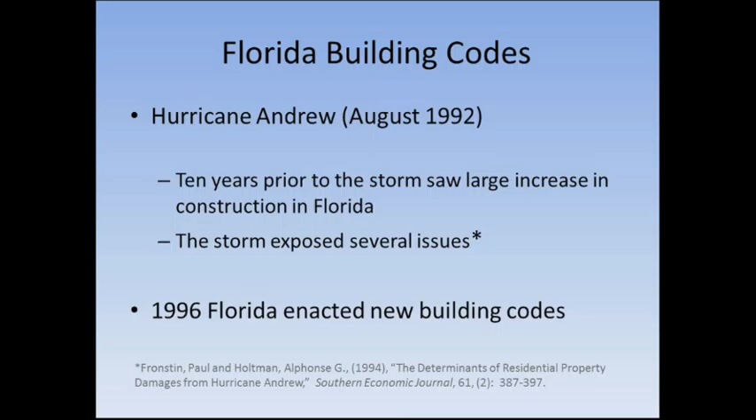Because we're going to look at three different things, and I'm going to do extremely quickly and may skip about half of it so we can get to the end. The effect of the recently enacted Florida building codes after Hurricane Andrew, a damage study on hail that I did with a colleague at Wharton, and then a most recent study that I've done with a colleague, Paul Kovacs, who's actually here, on benefit cost, because the economist is not interested in can you build something that will withstand an EF5 tornado? Do the benefits of this outweigh the cost? That's the only way we're going to be able to sell this idea. So really quickly, let's just go through.

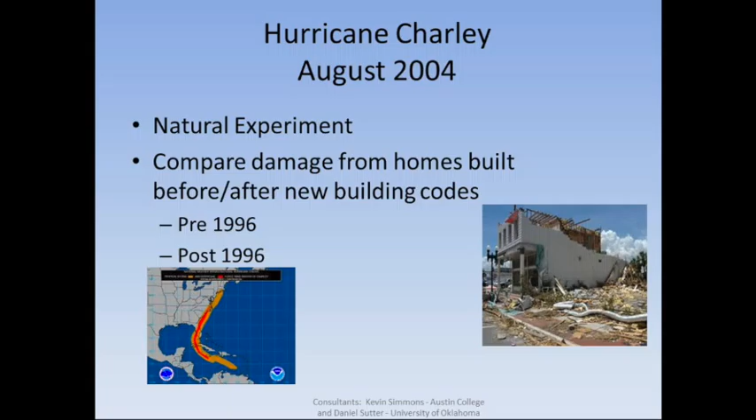In Florida, Hurricane Andrew illustrated that we had really inferior construction that had happened in Florida in the 10 years leading up to Andrew. Tanya's employer, IBHS, did a study after Hurricane Charley that provided a natural experiment. We could look at the damage for those built after the new building codes and compare that to the ones before. And what IBHS found was that in terms of the claim frequency, the newer homes are 60% less likely to have a claim, and further, if they did have a claim, the claim was 40% lower than homes that were built prior to that.

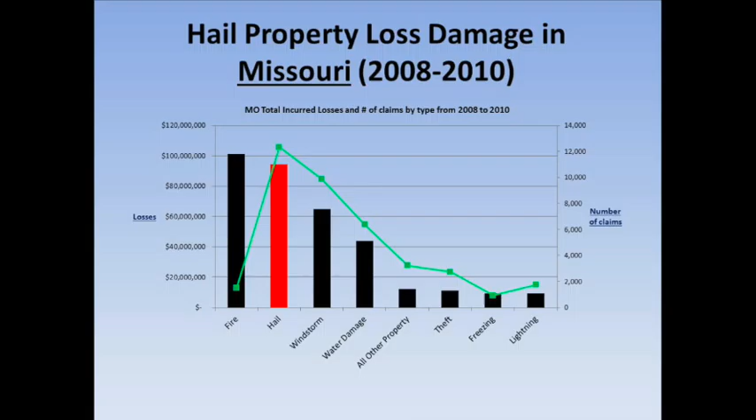Jeff Czajkowski and I, a colleague at Wharton, are doing a study right now in the state of Florida where we're looking at the entire decade. Our study is basically backing up what IBHS found. We're finding almost exactly the same results. Now, Jeff and I published a paper a year ago on hail. So Tanya's going to be really interested in this. I think she's actually seen the results of this paper before.

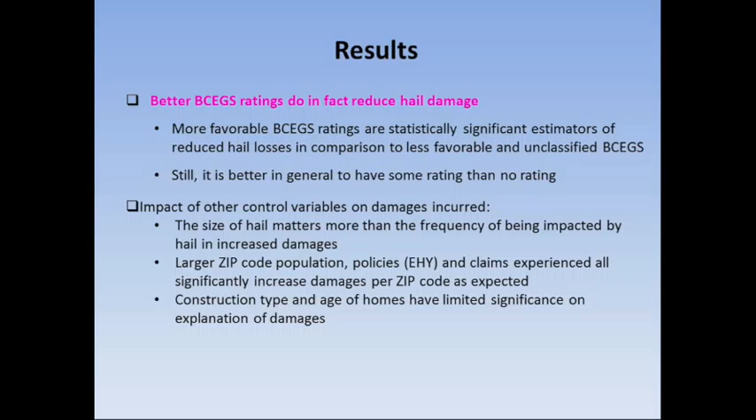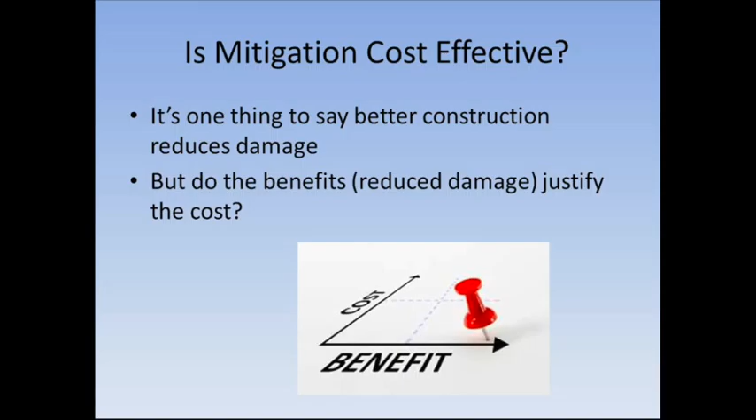And this is one of the things that Jeff and I used in our empirical model. Not to bore you, it's an econometric model, so those of y'all that avoided economics in college, we'll just skip right over that. But it's an econometric model that tries to understand what effect the BCEGS rating had on losses. What we found was that, in fact, the better BCEGS ratings do reduce damages. In fact, they reduced it by about 20%. So having the better ratings reduced overall damages from hail by about 20%. Now the economist comes up. It's one thing to say better construction matters, but do the benefits justify the cost? So what we're asking is there a cost effectiveness for the mitigation?

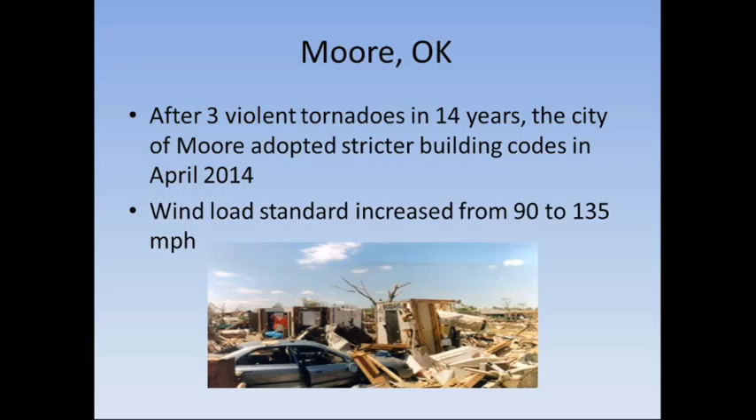So to look at that, we're going to look at a study that Paul and I, along with a colleague at University of Western Ontario, Greg Kopp, did. This was published this year in Weather, Climate, and Society. It was also the focus of a New York Times op-ed that came out last month. We focus on Moore, Oklahoma. We've talked about Moore, Oklahoma quite a bit already. Moore, Oklahoma regrettably had suffered 3 violent tornadoes in 14 years. The most recent was in 2013, which, as Aaron alluded to, we had some fatalities in a local elementary school.

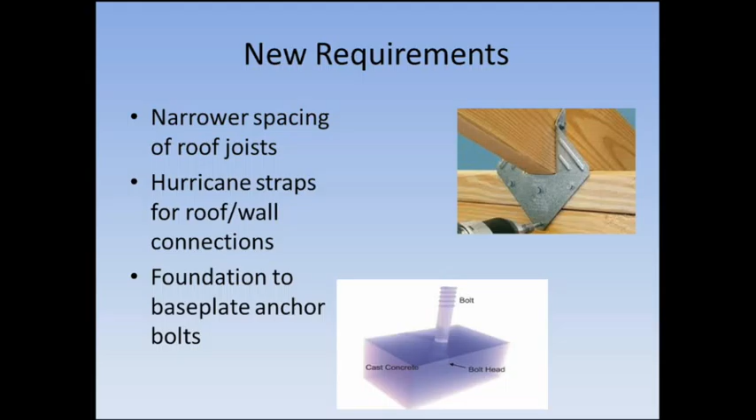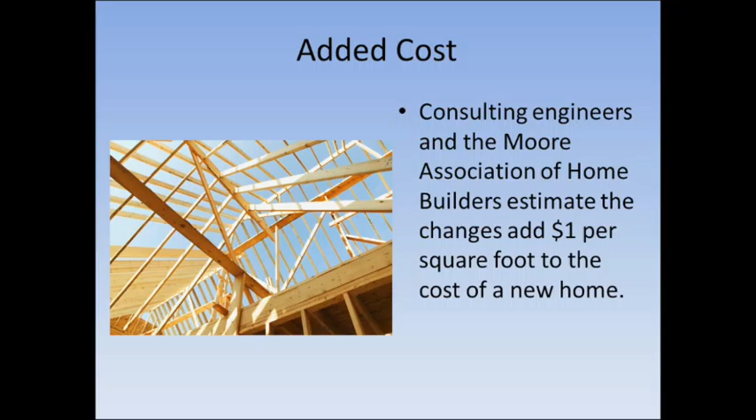This motivated the city of Moore to adopt stricter standards, to go from 90-mile-an-hour standard to 135-mile-an-hour standard. What did they do? They required narrower spacing of the joists. They required connecting the roof to the exterior walls with hurricane straps. They also required the base plates to be anchored to the foundations with anchor bolts, as you see there. In addition to that, they required wind-rated garage doors, as well as improved exterior sheathing.

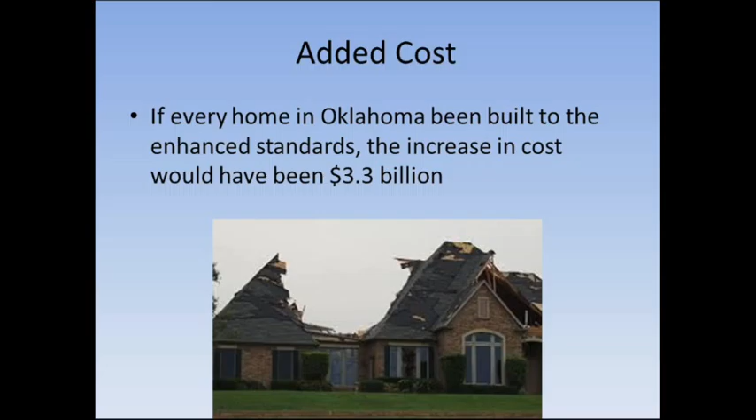All in all, the consulting engineer that worked with the Moore Association of Home Builders estimated that this adds $1 per square foot to the cost of a house. For the typical house in Oklahoma, which is about 2,000 square feet, that adds $2,000. If you were to have built every home in Oklahoma to those standards, the increase in cost would have been a little over $3 billion.

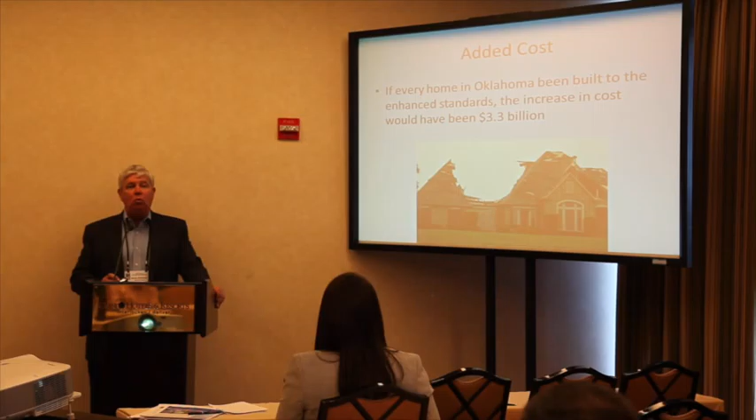So I want you to keep that number in mind, because for the mitigation to be cost effective, the expected reduction in damage needs to be more than $3 billion. So the next phase is to figure out, will we see a reduction in damage to justify that?

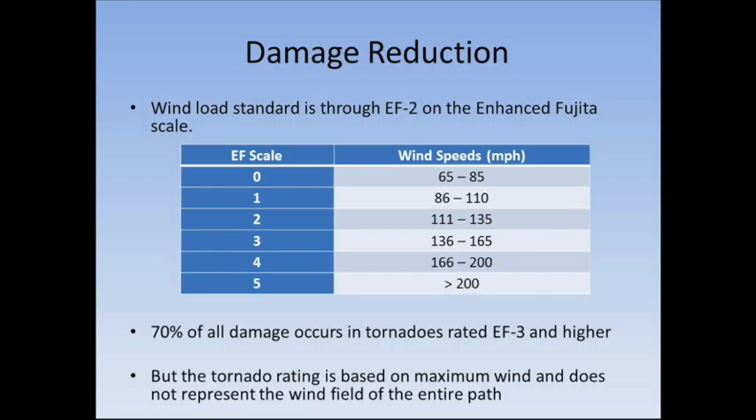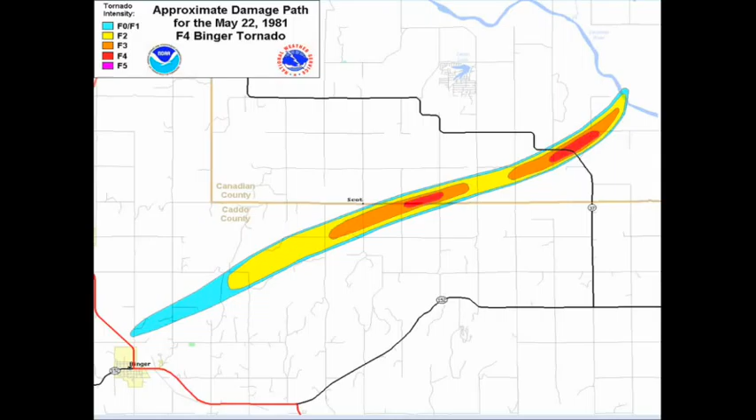Now, Mark kind of stole my thunder here, but the codes in Moore were basically to get you through an EF2 tornado. 70% of all damage from tornadoes comes from tornadoes rated EF3 and up. But the rating on that tornado is not indicative of the entire wind field. That's the maximum wind sustained across the tornado. In fact, this is an illustration of a typical tornado, and the dark red is the most intense wind field. And as Mark alluded to, that's a small percentage of the overall path of the tornado.

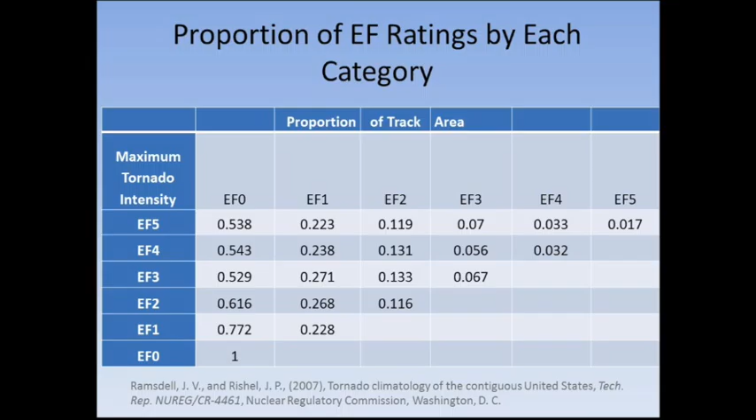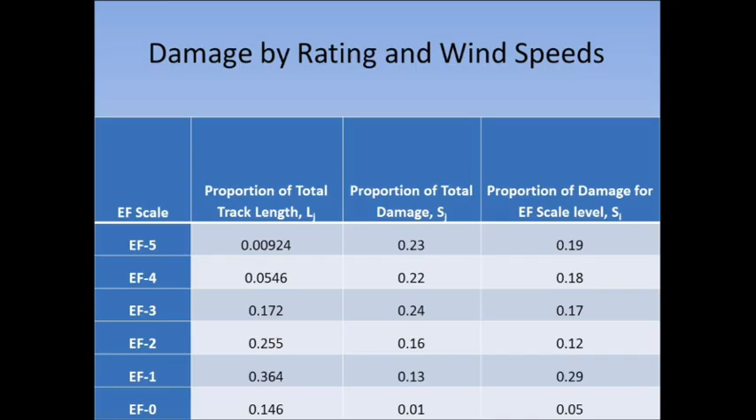The middle column would be the estimate of damage if all you took was the maximum wind, in other words, the rating of the tornado. 23% of all damage would be from EF5 tornadoes, 22% from EF4. But if you take into consideration the wind fields, that changes that column, and you can see that on the far column on the right.

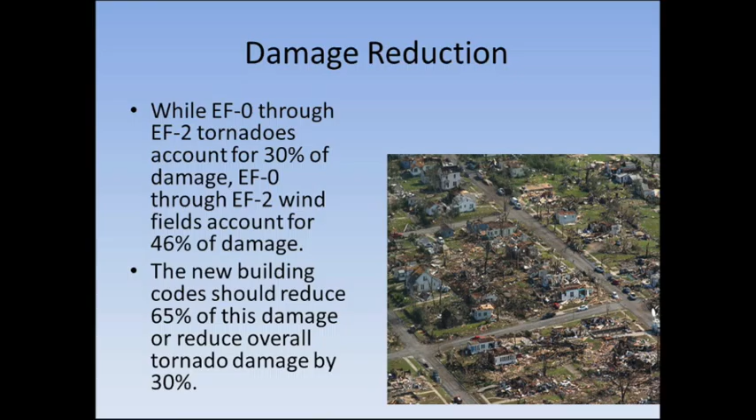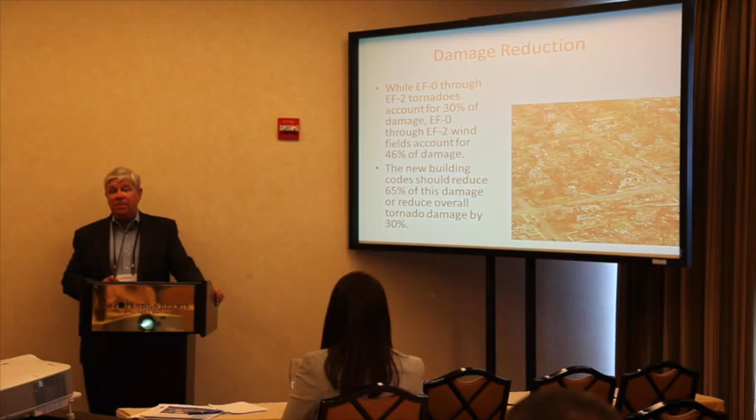Even though 30% of the damage comes from tornadoes that are rated EF2 and less, once you change that to wind fields, 46% of all the damage comes from wind fields that are EF2 and less. Those are the ones that we can build for. We probably cannot build economically for an EF5 tornado, but we can build for tornadoes in the lower range.

The Moore codes that were adopted - Greg went through an extensive analysis of the effect that they would have - and our estimate is that two-thirds of all the damage within that 46% can be mitigated with the Moore codes. That translates to a reduction overall in tornado damage of 30%.

So the next thing we need to figure out is, how much losses can Oklahoma expect over the next life of a home, say 50 years. We had 25 years of insured loss data for Oklahoma. Based upon that, we extrapolated that into the future to get us an estimate of 50 years worth of losses.

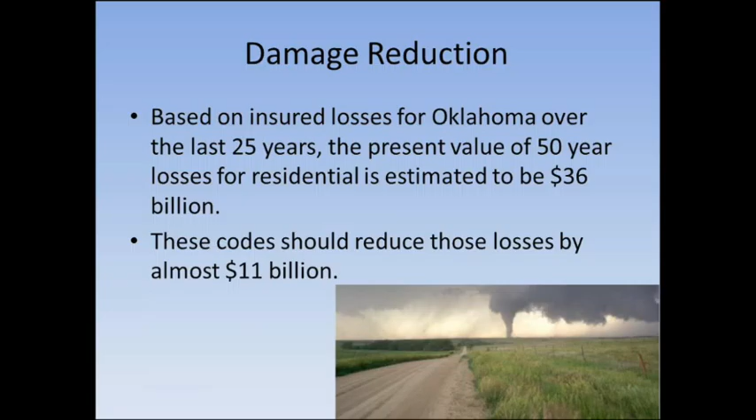Now I'm going to throw in a little bit of finance here. We took the present value of that because we're trying to make a current dollar to current dollar estimate. The present value of our estimate of future damage in Oklahoma is $36 billion. If we mitigate 30% of that, that's $11 billion.

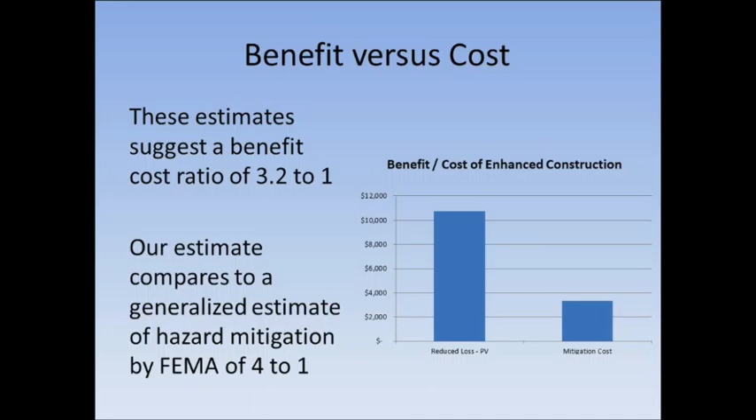So keep in mind two numbers. What was the cost? It was about $3 billion had we built every home in Oklahoma to the Moore standards. The amount of mitigation that we can expect is $11 billion. So that gives us a benefit to cost ratio of a little bit over 3 to 1.

Now when you do a benefit cost analysis, it's very important that you follow up with what's called a sensitivity analysis, because there's a lot of variability in our assumptions. There's 5 variables that go into our benefit cost analysis.

The amount of damage that can be reduced - Greg could have been wrong. The additional cost - the consulting engineers could have been wrong. The amount of future losses - Oklahoma may not have another tornado for the next 50 years.

But if recent past is any indication, this is what we expect. Also, we had to take into consideration what percentage of the damage was occurring residential, because the Moore codes were residential. The Oklahoma Department of Insurance gave us this number: two-thirds of the amount comes in residential. And finally, something called the discount rate.

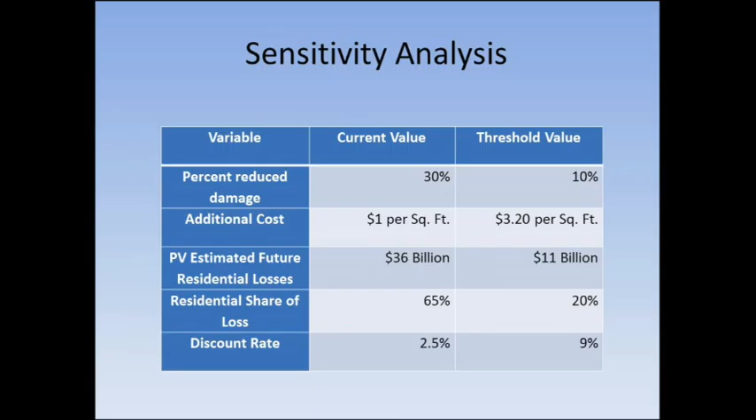Well, this gives you what our sensitivity analysis will tell us. What does each of these variables have to fall to flip the benefit cost, to make it go from positive to negative? Our percent reduced damage needs to go from 30% to 10%. The cost needs to essentially triple. The present value of future losses needs to go down.

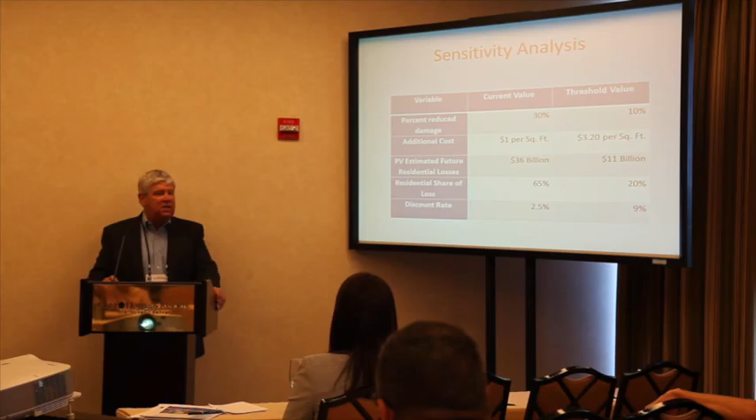The residential share of losses - maybe it never hits another house, maybe it only occurs in commercial buildings from here on out. And the last one, what does the discount rate have to do to change that benefit cost analysis?

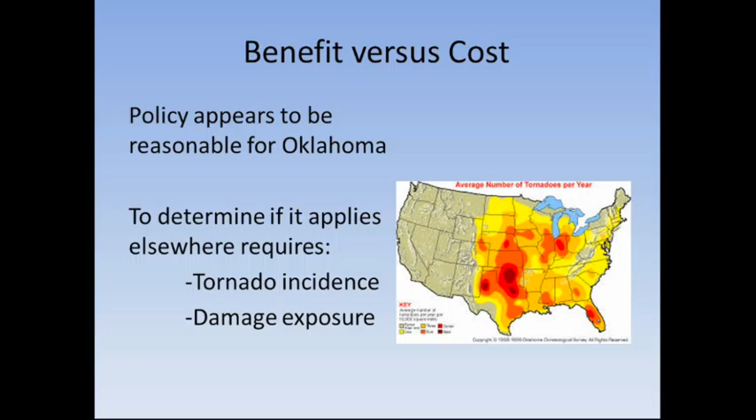Some understanding of the potential payout of what the city of Moore did, and it makes it sound like a good policy that should be considered for the entire state. For this to be applicable to other areas really depends upon their probability of getting a damaging tornado. You can't say just because it pays off in central Oklahoma that it's going to pay off everywhere.

And that's the next follow-up that we've discussed, is to look at other states to see where the benefit cost analysis will work and where it won't work.